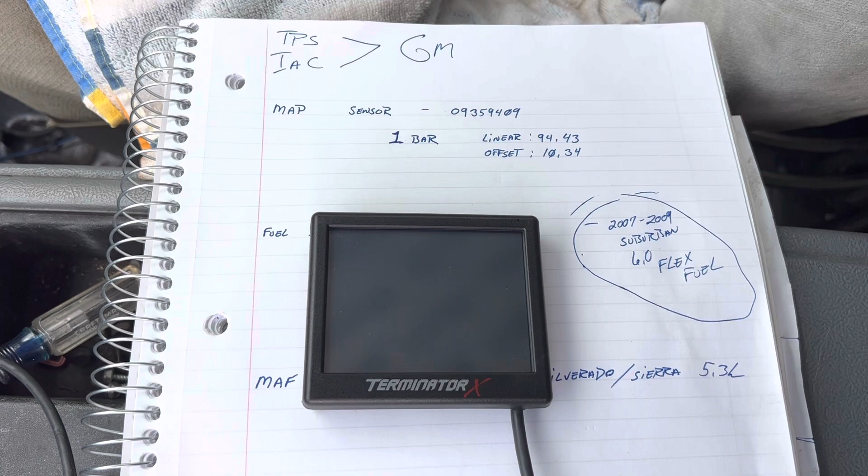Before we get started, it's really important to understand what sensors you have on your motor and what fuel injectors you have. These things take calibration data that has to be very specific in order for the controller to accurately control the engine. The awesome thing about aftermarket controllers is you can use any sensor or any injector you want, wire anything up, then go in and change the calibrations to make it work.

So for us, we just want to understand what's in our throttle body. It's not drive-by-wire, it's a cable, so we have a TPS and an IAC sensor. They both come out of late model GMs, right before GM switched to fly-by-wire.

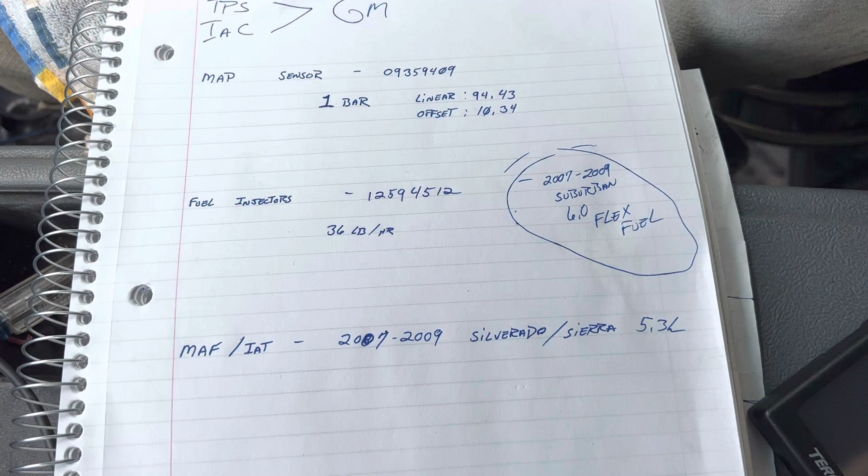Another important thing to understand is what map sensor you have. We have a 1-bar map sensor, which is the map sensor that comes with the LY5, or LY6 or LC9, with the 6-liter Vortec motor. I actually think the controller right now is calibrated for a 2-bar map sensor, and I'll show that to you before we even get started going over things.

Another thing that's important to understand is your fuel injectors. You need a part number for what's on your fuel injectors. The part numbers are always written right on the side of the body of the injector, and from that part number you can head to the internet and understand the flow rate of the injectors. Ours are 36 pound-hour injectors, they come out of an 07 to 09 Suburban flex fuel.

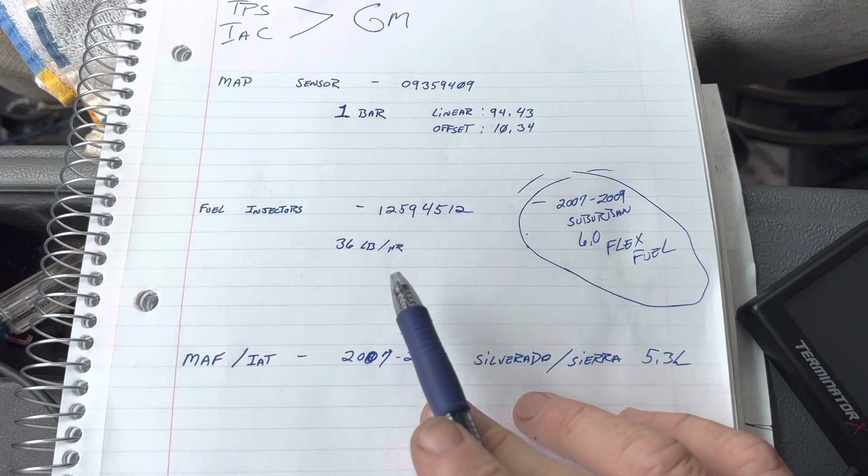These fuel injectors, there's more data to them that you need to know. There's a voltage offset, which says they flow more or less based on how much voltage they get away from their target. There's also a pressure offset that says they flow more or less based on fuel rail pressure changes, and an offset for pressure changes at the pintle, like when the intake manifold is in heavy vacuum at idle or deep decel versus atmospheric pressure at wide open throttle. These are extra calibrations, and there's also a minimum on-time for the fuel injector to even start flowing anything, which matters almost as much as the flow rate for idle characteristics.

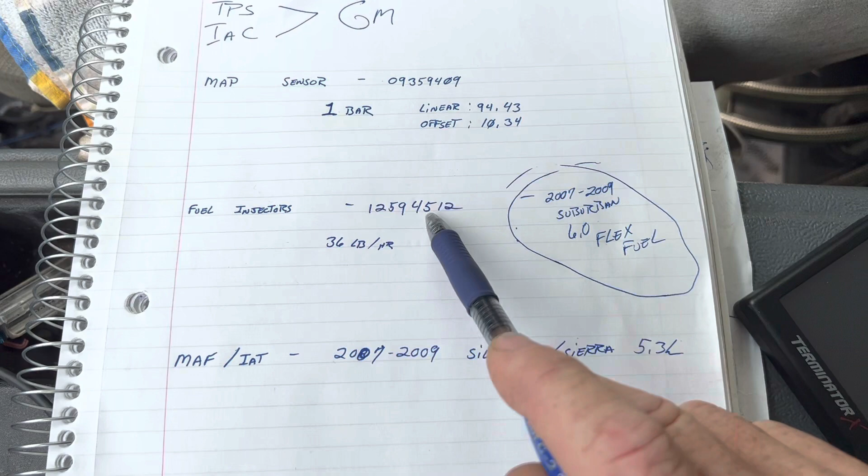So there's a lot more data, and the higher end injectors always come with sheets for injector data. In fact, we could argue that's what determines the better injectors from the lesser ones, is the data they do or don't come with. But with this information, we have all that we need to know.

Also, the mass airflow sensor - we use a 5-wire mass airflow sensor here, so it has the mass airflow and the intake air temp sensor integrated together. The Holley controllers do not use a mass airflow sensor, they run in speed density, but because we have a 5-wire MAF, we also have the inlet air temp. Speed density very much needs to know the temperature of the incoming air.

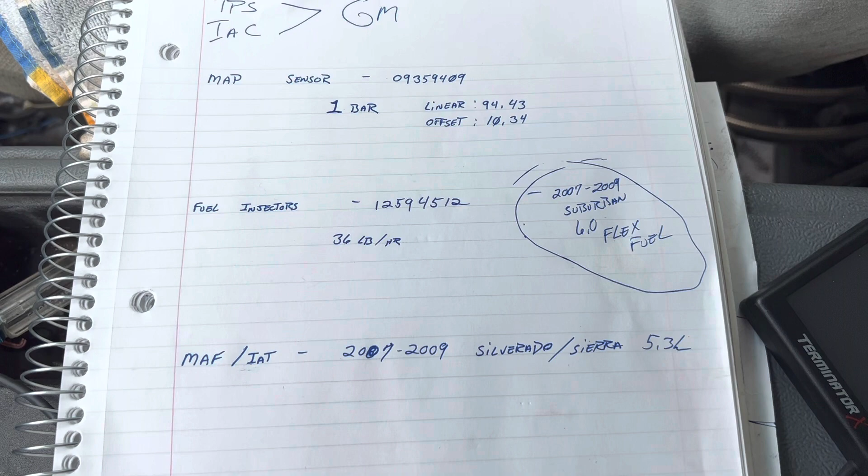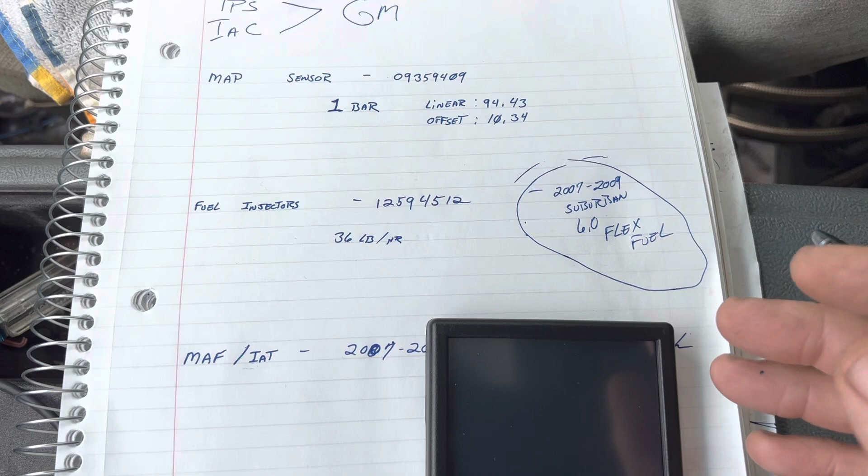I think that's pretty much everything we need. There's some other things you need to know about setting up the controller, like how many teeth are on the crank and the cam, your displacement, and what cam you've got. But these variables are very important to get calibrated to get it running right, and I want to show you a great case in point on that right now.

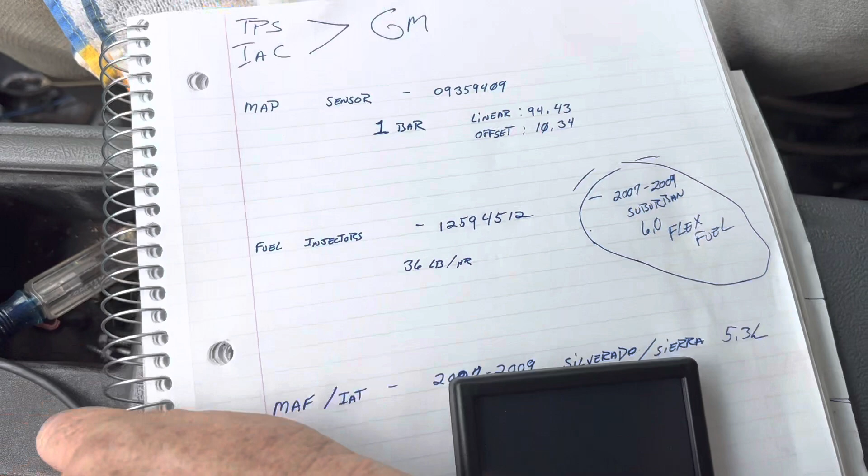With our map sensor, the Holley Terminator also has its own onboard map sensor. It's got a little blue hose running out that you can connect to a vacuum source on your own. I just wanted to use the GM map - you know, they can go either way.

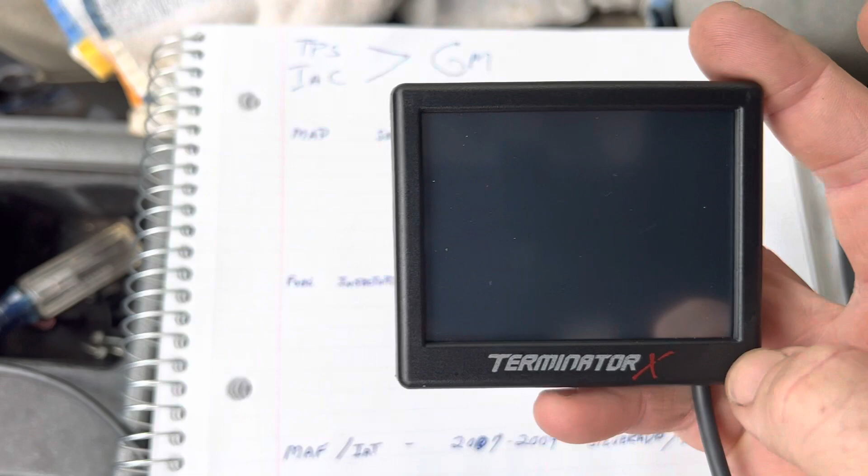All right, so let's power up the controller. I've already kind of got it calibrated, I'll walk back through the calibration again in a minute. I just want to show you guys something on this 1-bar MAP sensor.

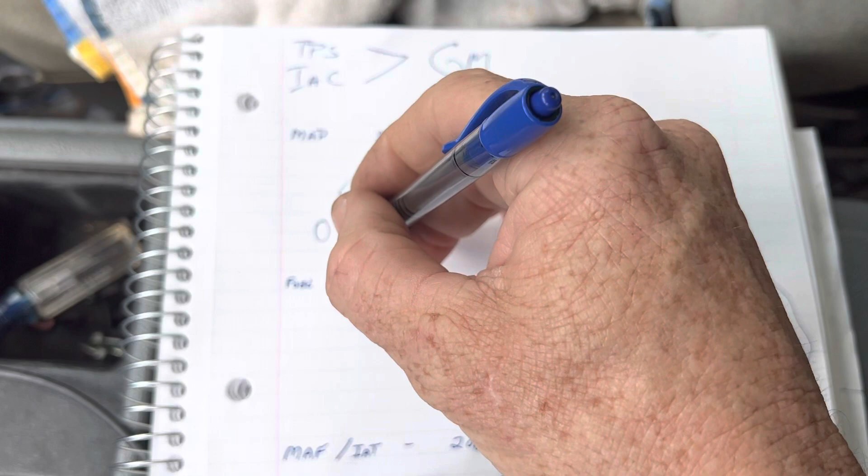A 1-bar MAP sensor - all MAP sensors run from 0 to 5 volts, right? The difference between 1, 2, and 3 bar sensors is where they register up at 5 volts. They all start at 0 kPa, at 0 or whatever, but then they'll go up to 5.

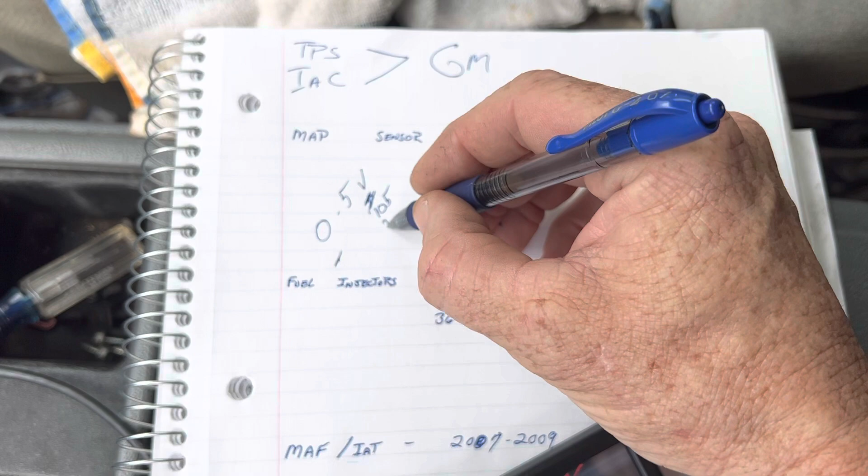Instead of going to a 1-bar, it'll go up to 105 kPa by 5 volts. A 2-bar will go up to 210 kPa by 5 volts. A 3-bar will go up to 315 kPa by 5 volts. And that's how that works.

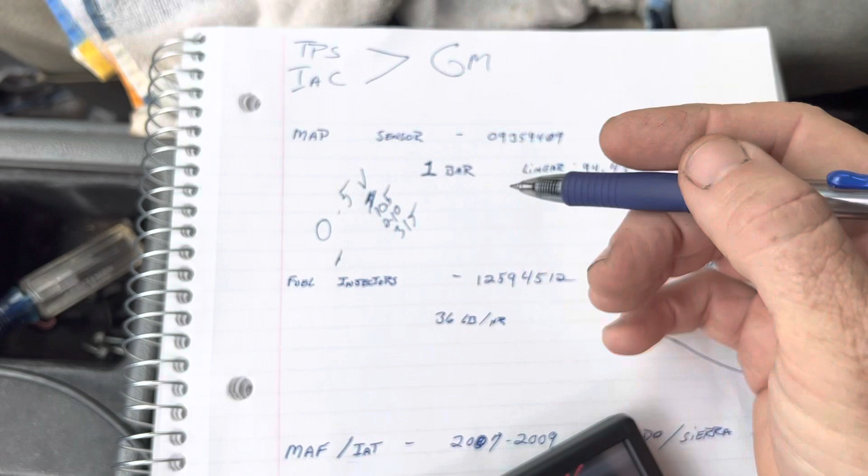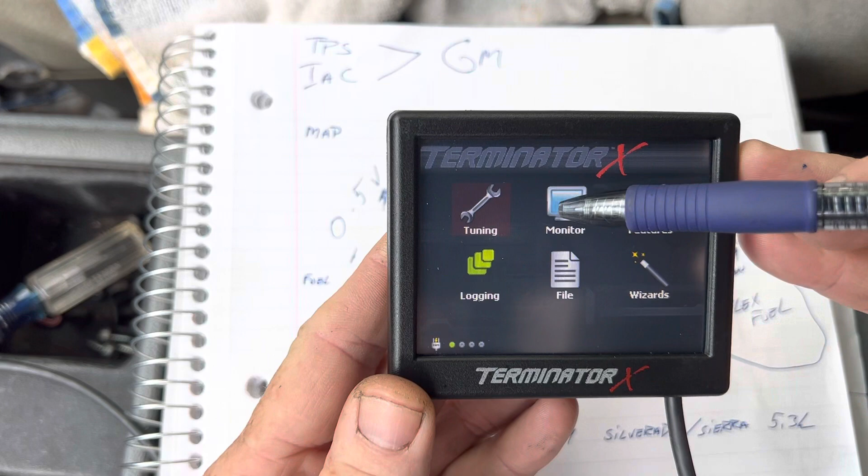And I think that because when we go to our gauges, we'll go to monitor, and then here it double taps, so we'll go to multi-gauges, then we'll go to sensors. And then if you look, MAP is showing 125 kPa. Whoops. How is that possible?

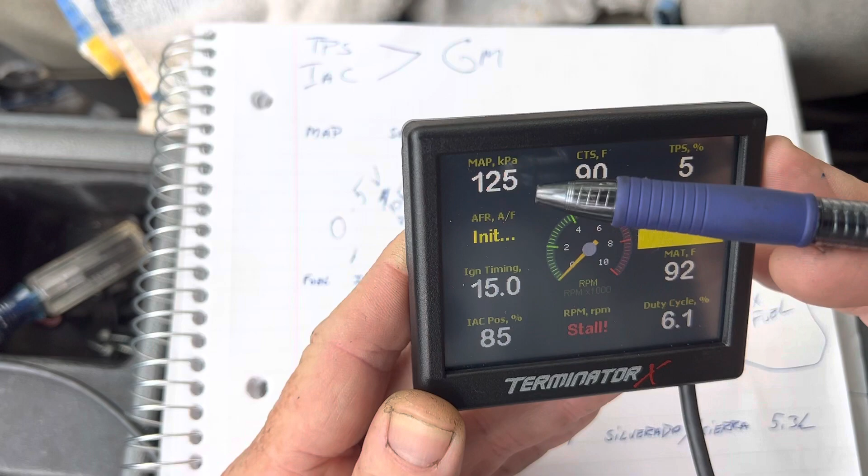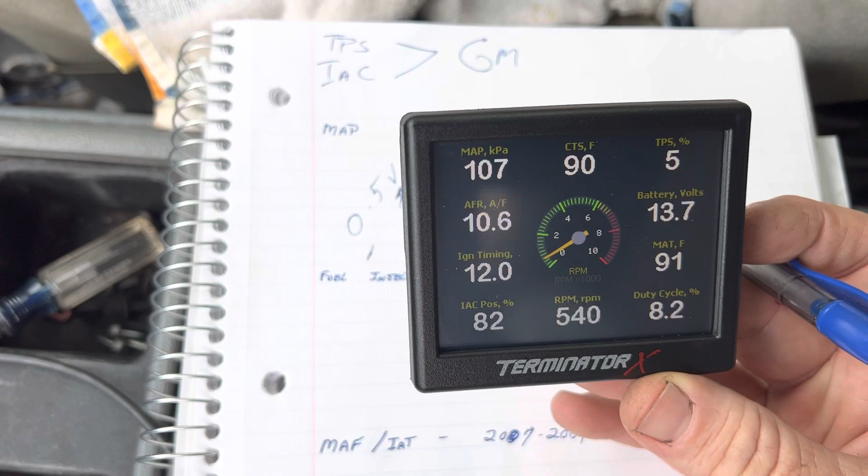When we crank it, when we start it, it'll dip down only to like 90 or to like 105. I don't think that's right.

So let's walk back through setting it up with the handheld.

Oh no. Hold on a second, I have to get that. Nah, I'll get it later. I'll get that later, it'll be fine.

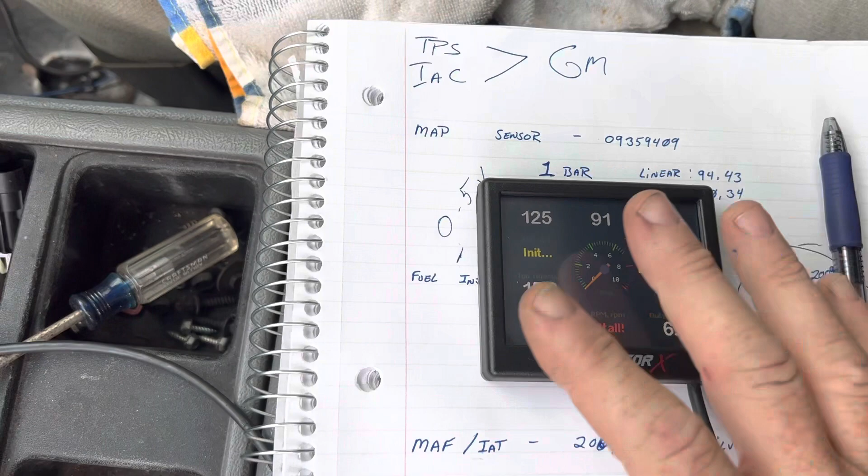Okay, we'll go back to home. Put this up nice here so everybody can see it.

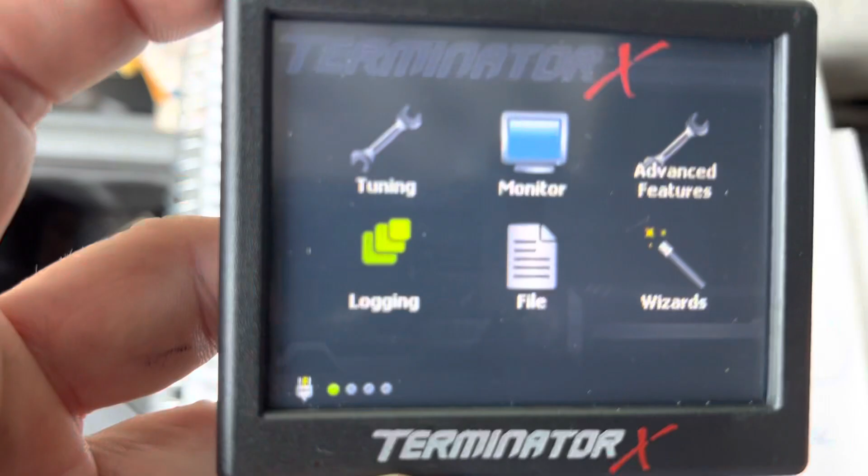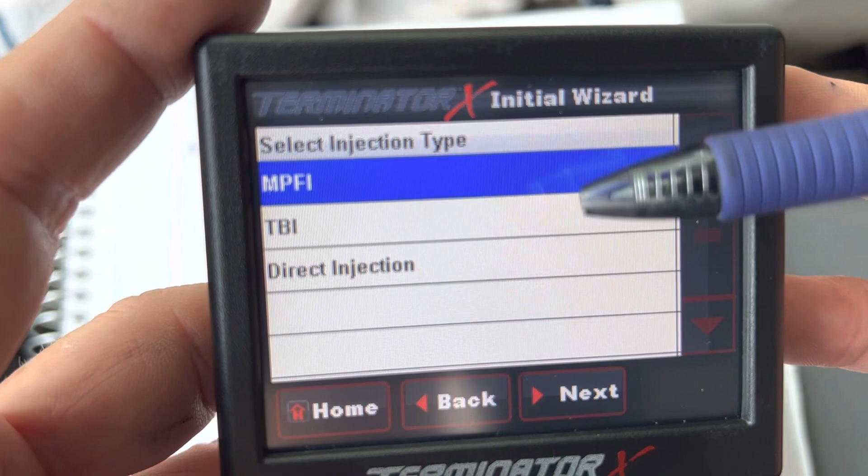And now, select what type of injection you have. MPFI is multi-port fuel injection. TBI is throttle body fuel injection. And DI is direct injection.

This is asking you where your fuel injectors are. We have one injector at the end of each runner outside of the intake valve. This is multi-port fuel injection.

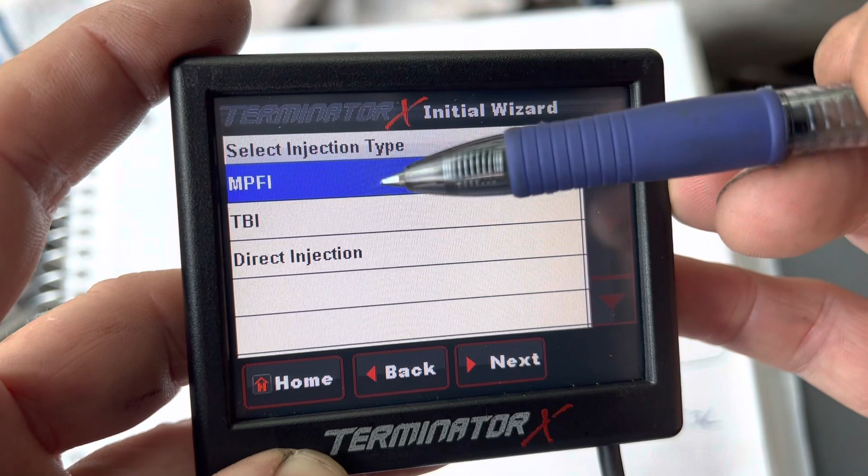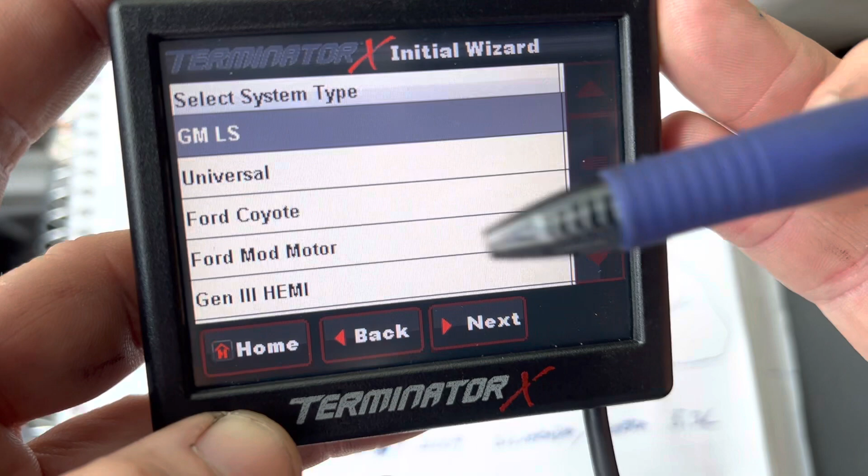Select system type: GM LS, Universal, Ford Coyote, Ford Mod Motor, Gen 3 Hemi. We are obviously a GM LS.

Number of cylinders, 8. It's the only option for an LS. Firing order only gives us one option, good.

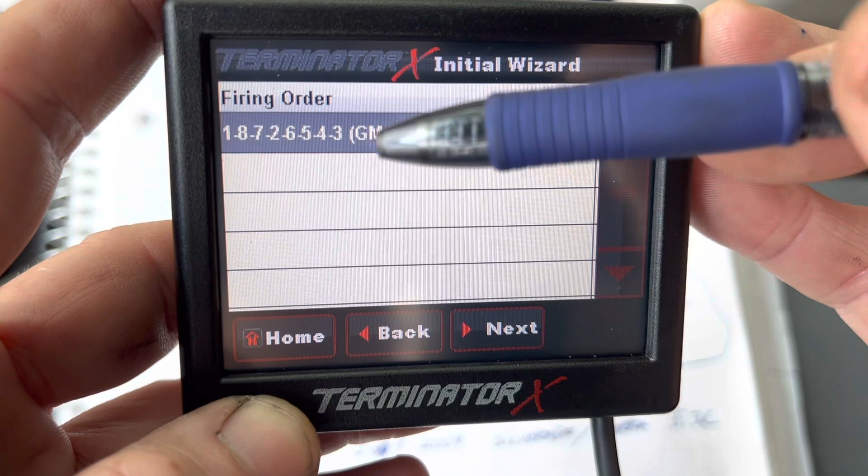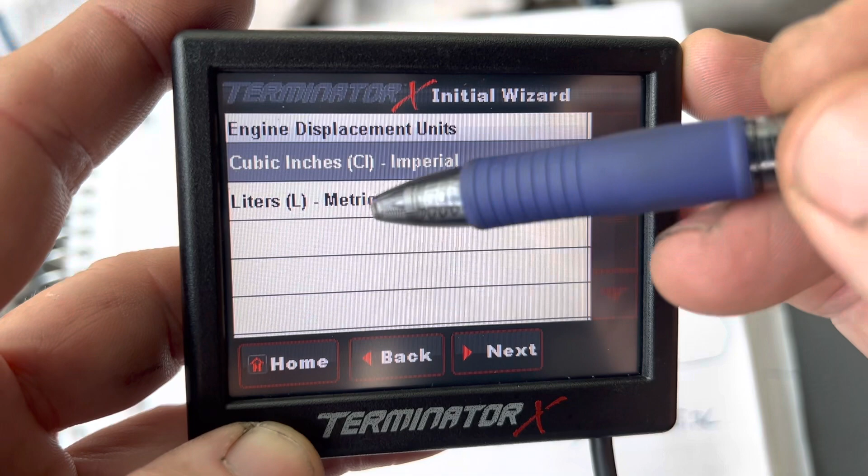Engine displacement, you can tell it how many cubic inches, or how many liters. Let's pick liters. It's a 6-liter engine.

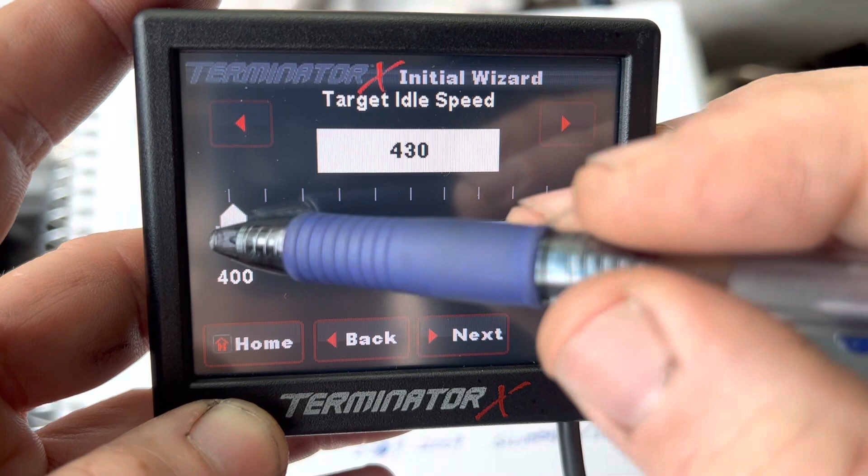Target idle speed. 800. Yeah, let's say 850.

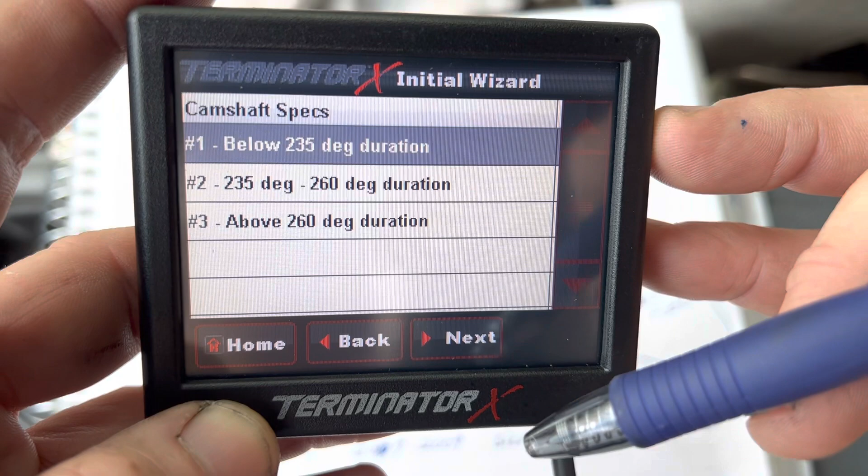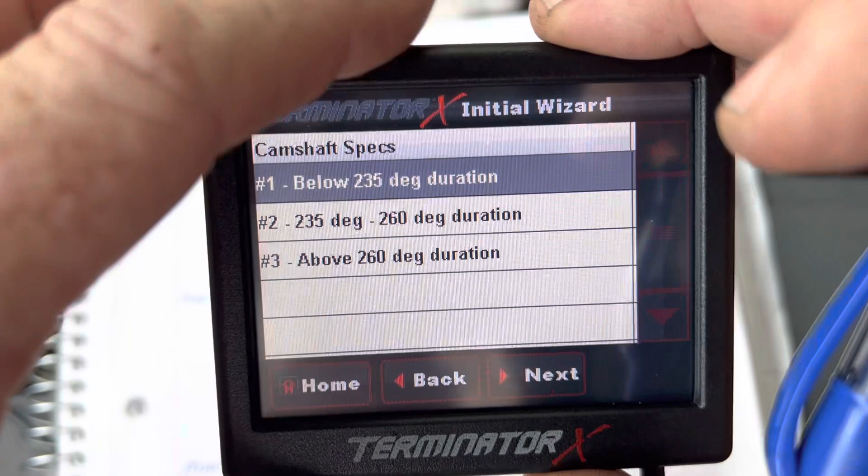Camshaft specs. So what Holley always tells you is if you don't know what the specs are, just go with number 1. We might come back here and revisit it later. We have a stage 2 cam. I might be in here, but I'm not sure. So I'll just go with 1 for now.

Ignition type. This is where I was telling you guys a minute ago about needing to know how many teeth are on the cam and crank. This is a Gen 3 motor, so we have 24 teeth on the crank wheel.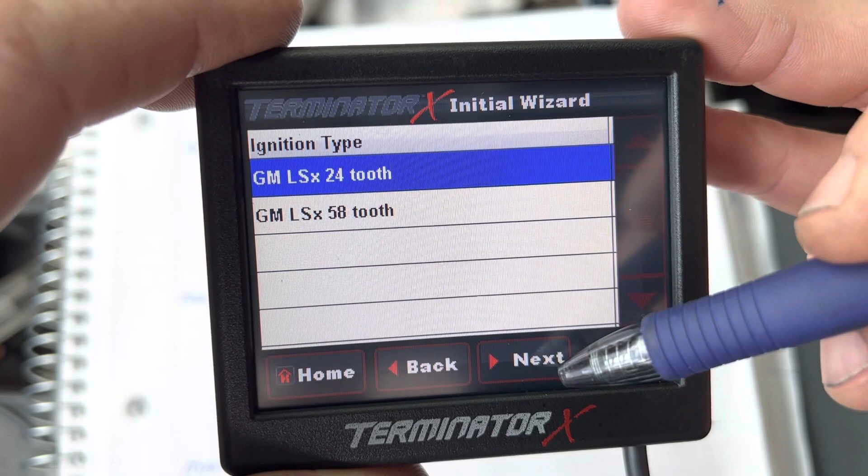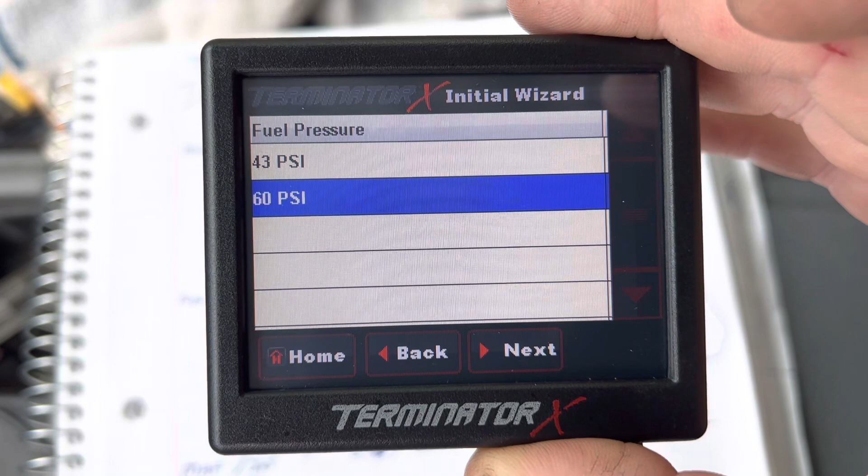Fuel pressure, 60. We're running a GM fuel regulator, so we cannot adjust the fuel pressure. It is automatically set at 58. It is always better to run the higher fuel pressure if you can.

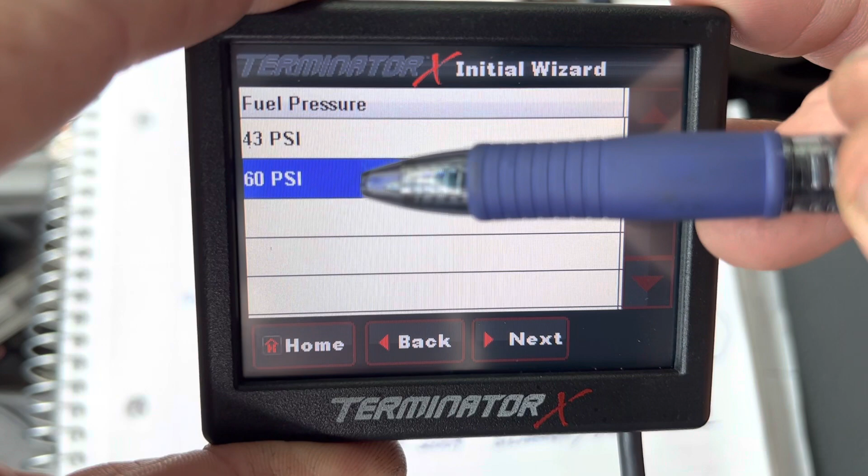And that higher fuel pressure is part of why we like to have all of our fuel lines made by Industrial Hose and Hydraulic. We have very professional transportation lines made because fuel pressure is getting pretty high these days, guys.

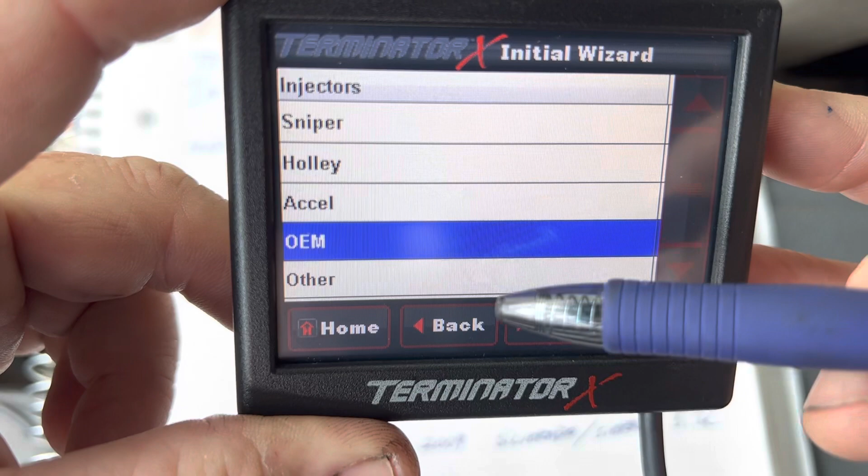Okay, Terminator injectors. This has been a thing for me. So on here, you can select what injectors you have. You can select the Sniper, the Holley, Accel, OEM, or other. If I try to select OEM, I do not get the option for the injectors I have.

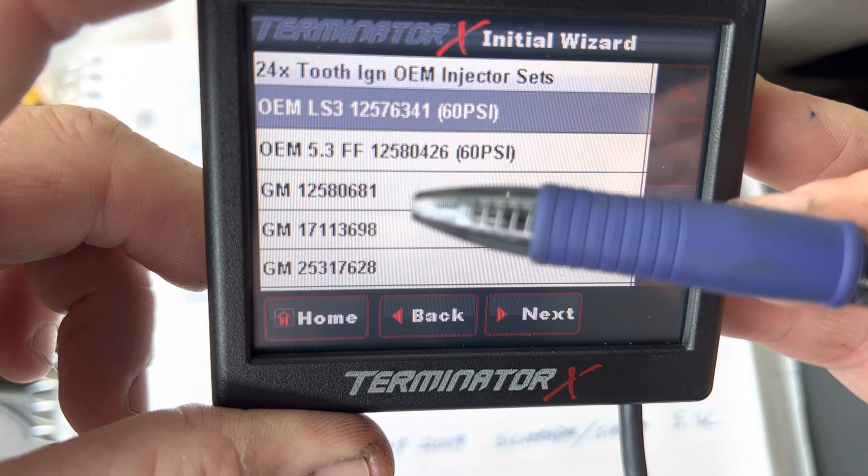I have 1259 4512. I have 4512. And you just, no matter where you look, you don't see 4512.

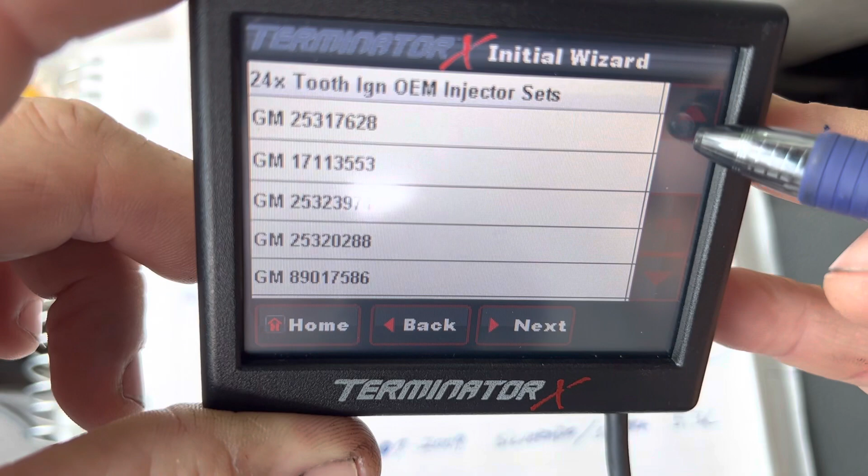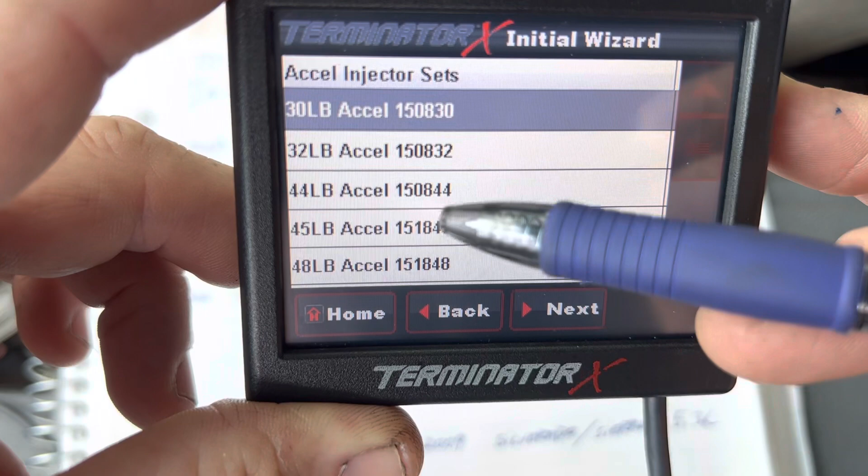So we go back and we look at Accel's. Accel has 30, 32, 44, 45, 48, and bigger. If we go to Holley,

Holley has an option for 36-pound injectors, okay? So that's what I'll say, is we got Holley 36-pound because it's 36 pounds per hour.

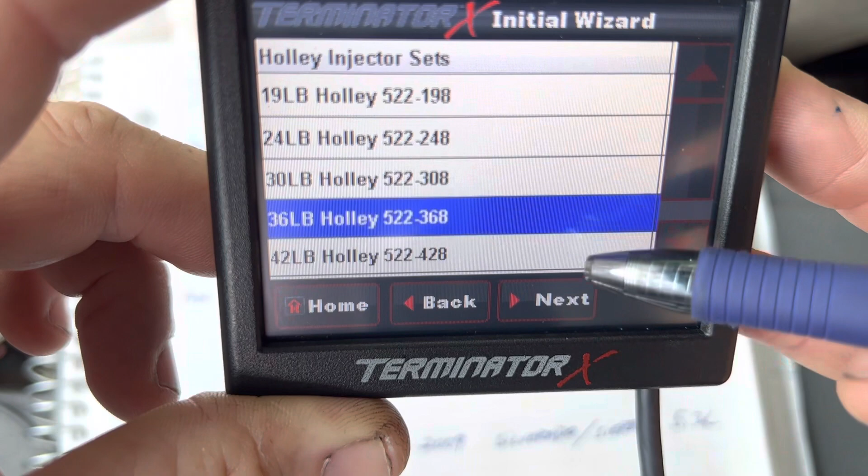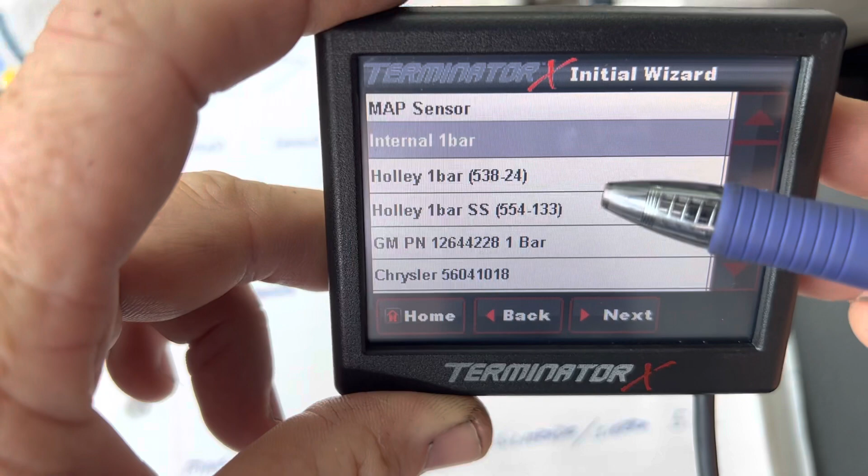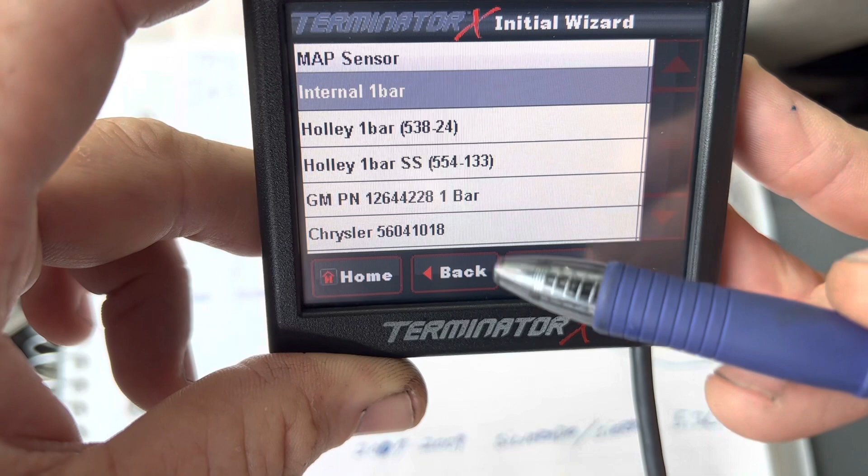Power adder, none, although this, you can tell it has power adders. MAP sensor: internal 1 bar, Holley 1 bar, GM, Chrysler. We get no option that matches what ours is. So I will take this GM 1 bar.

Drive-by-wire, no, we're not drive-by-wire. Idle air control valve.

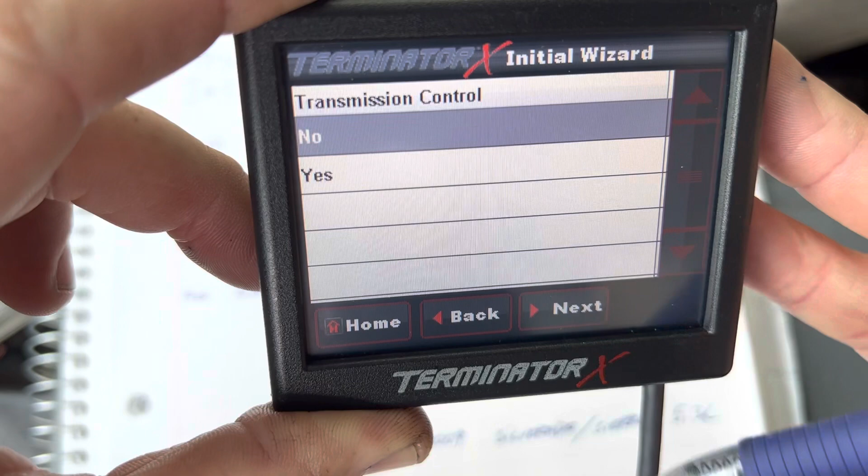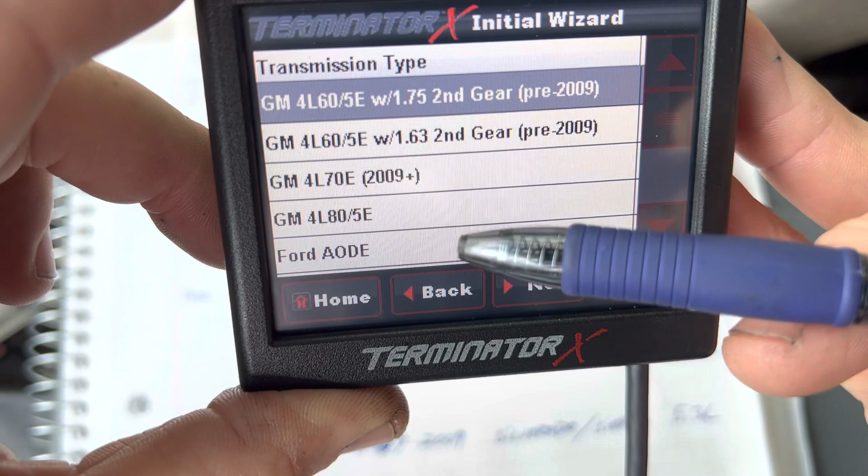Transmission control. Yes. Because we are a 4L80.

Tire diameter. I think we decided we were 35 or 36.

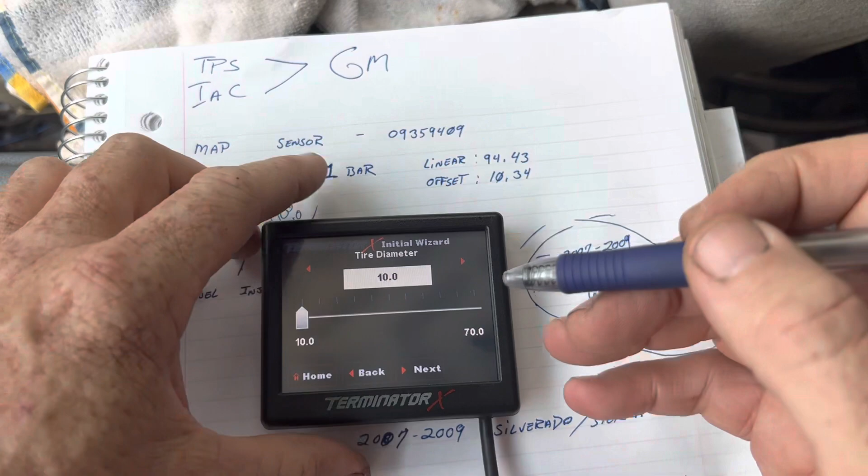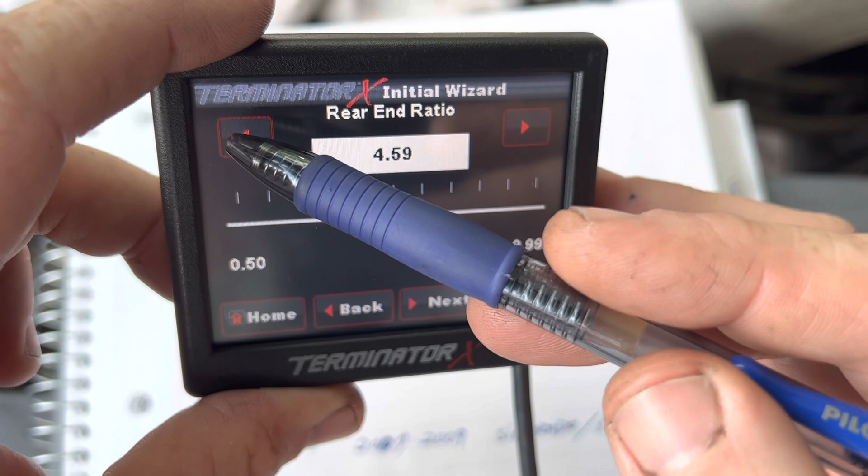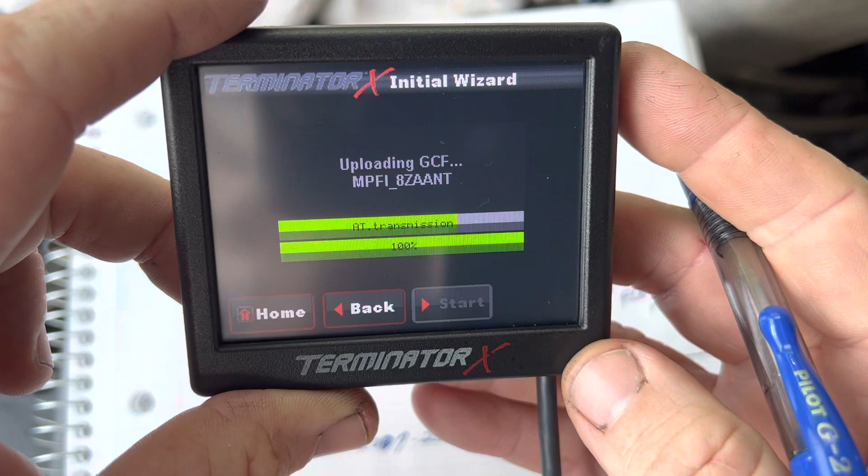Rear end ratio, front and back, and that's it. Now you tell it to start, and now it uploads the file. And that's it. Tells you to cycle the ignition, and it's done. Now you come back in.

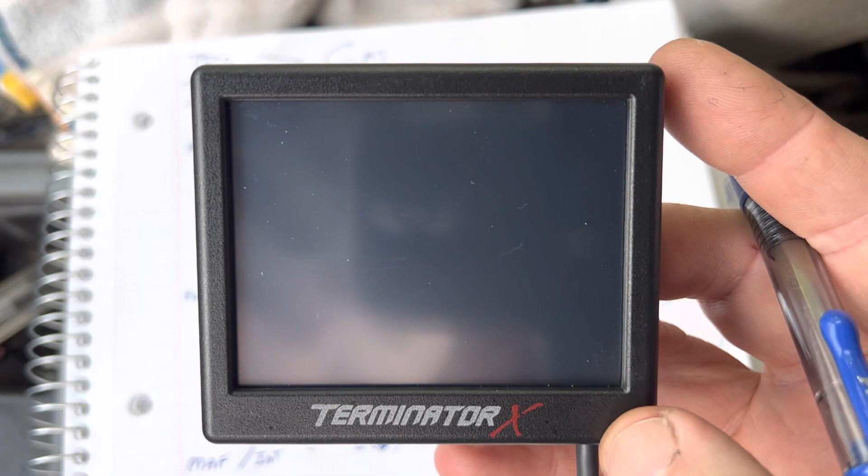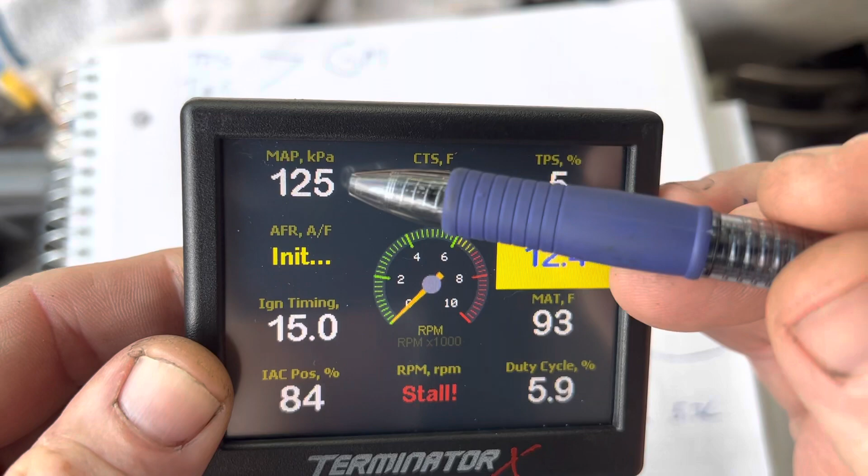When we go to monitor and we look at the multi-gauge and the sensors, unfortunately our map is still at 125. We're here in Florida, we are at sea level, so our map sensor should read 105 kPa, but it should never be over 105 kPa. That means, even though it's a 1 bar map sensor, my linear and offset are different. A linear usually means the range that it can handle. This 1 bar map sensor will cover 94 kPa.

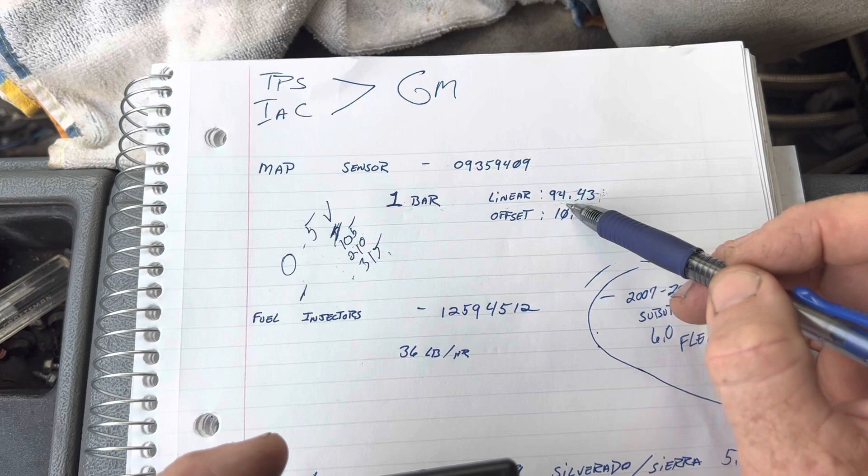And the offset is how far we are from 0 when we start reading, okay? So at 94 kPa is as high as it can go, plus 10, so we'll hit like 105 total by 5 volts, that's the basic math of how that works.

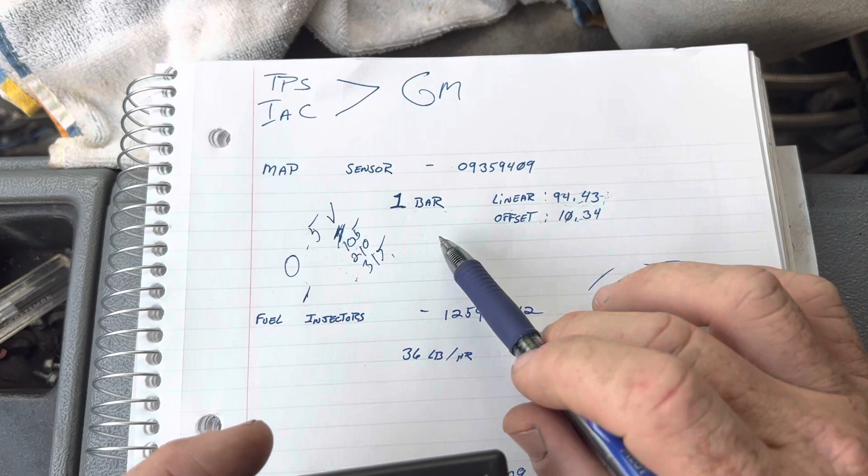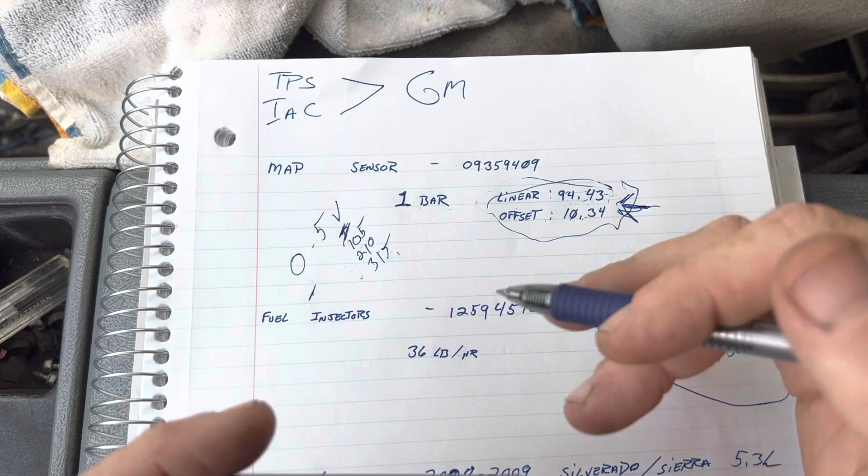And this is not Holley's own linear and offset with the map. This is something I'm pointing out from HP Tuners, and we will understand what the Holley is in a little bit here, because I'm not going to tune this way. I'm actually not really super happy with the way it runs. I'll start it up real quick. I just don't like what that map sensor's doing.

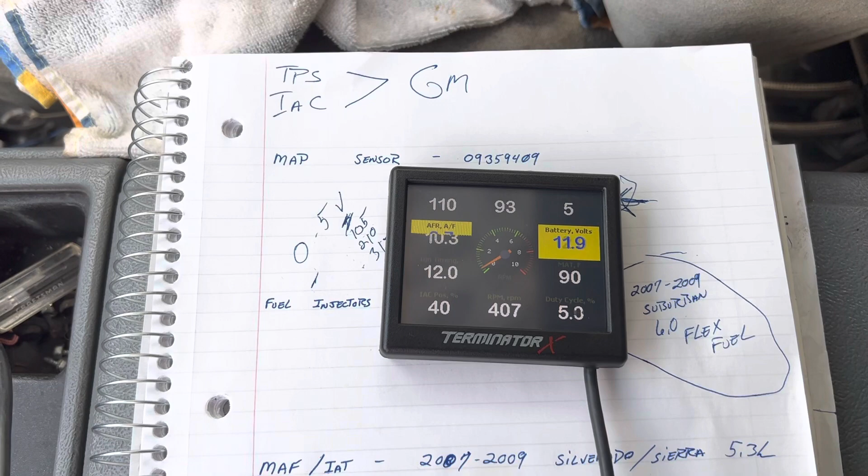I also don't like the idle air control position open at 40. I should open that up a little bit. That should be around 10 or something like that.

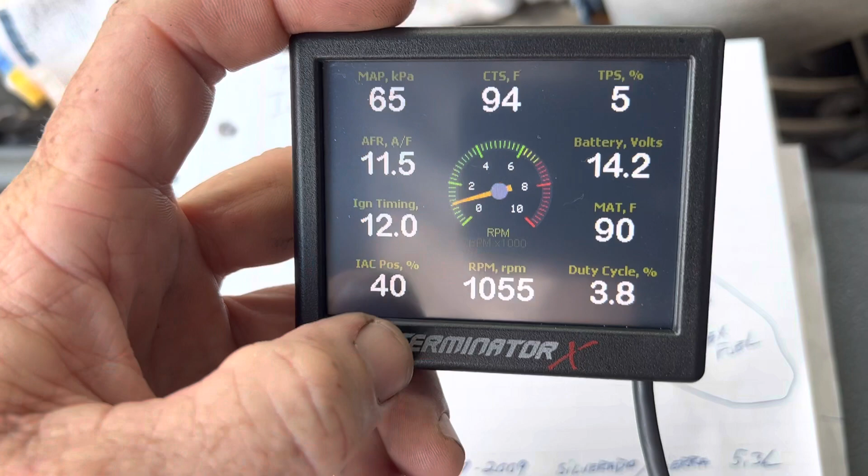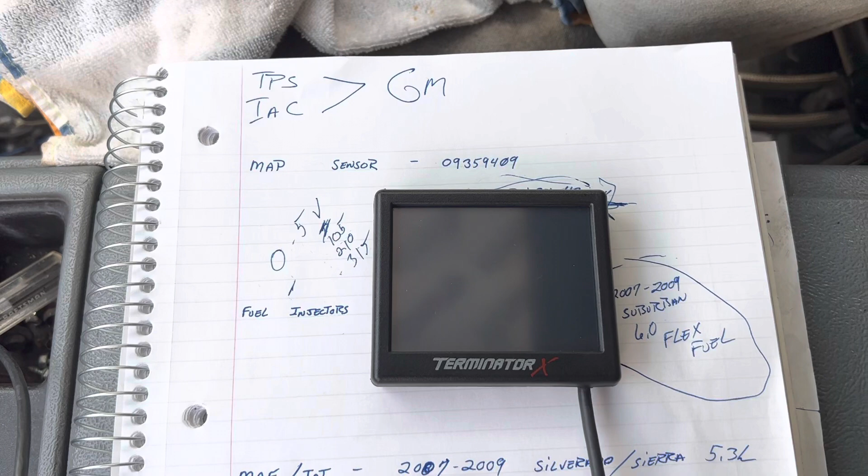So from here, the Holley Terminator and the Holley Snipers all come with this beautiful little handheld controller. The handheld controller has a little SD card in it that has some calibration files preloaded for whatever you're going to do. It's a small touchscreen, and that's how you can negotiate it in this way.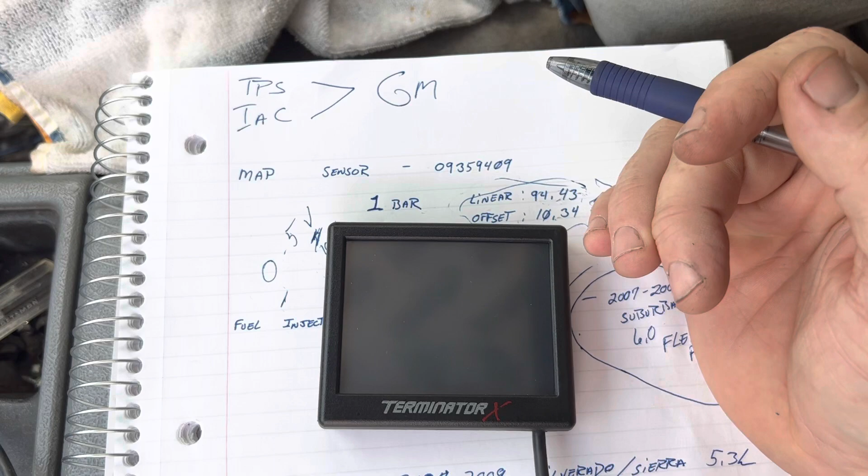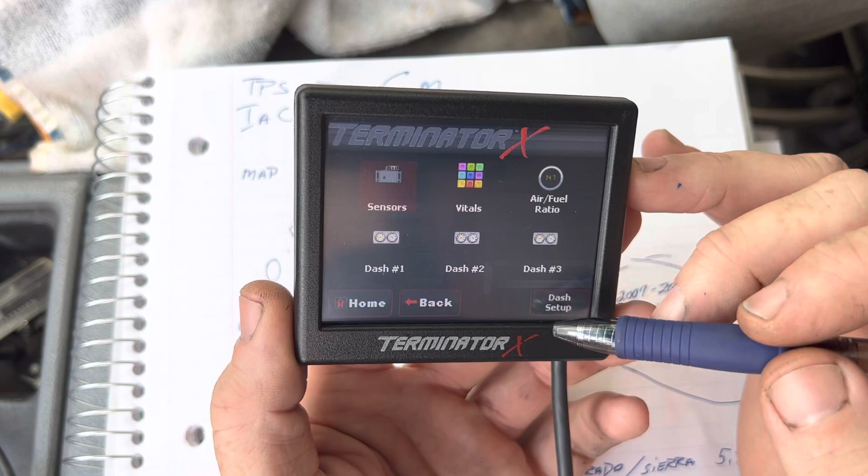Once we're up and running, I guess to be fair and clear, there are other things that you can do to manipulate with this Terminator X handheld. These things would include, you can touch the screen, come over here, go back, and go to tuning or advanced features. You can go into tuning, into basic tuning, and you can tune, let's say, your spark.

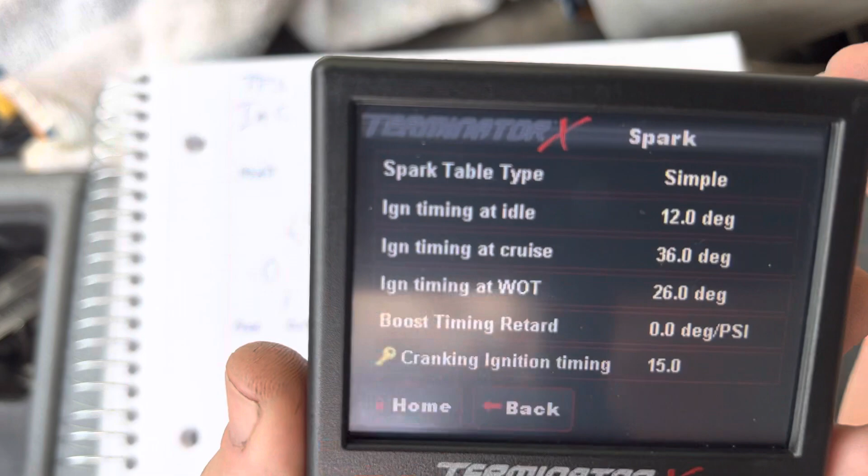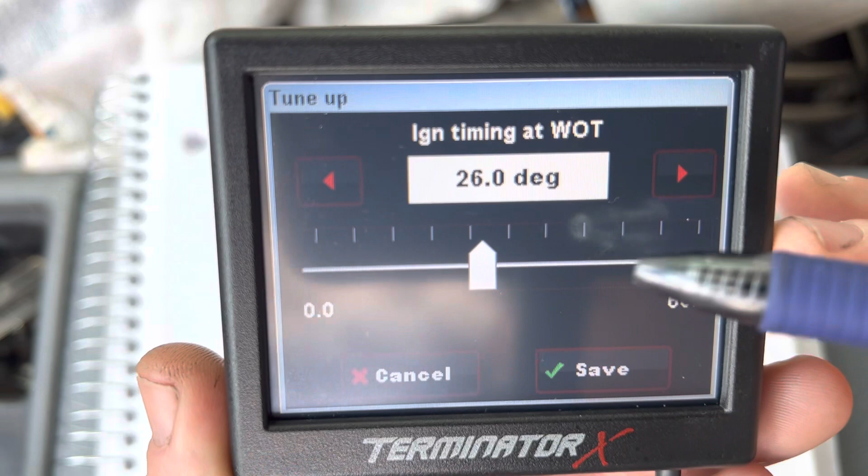And you see what it lets you play with right here? Spark table, ignition time at idle, ignition time at cruise, ignition time at wide open, boost retard, and cranking ignition time. So if we want to adjust wide open throttle, there we go. It gives you a nice little table, and everything is meant to be really easy to make changes to. You can save it or cancel it, and go back and change everything.

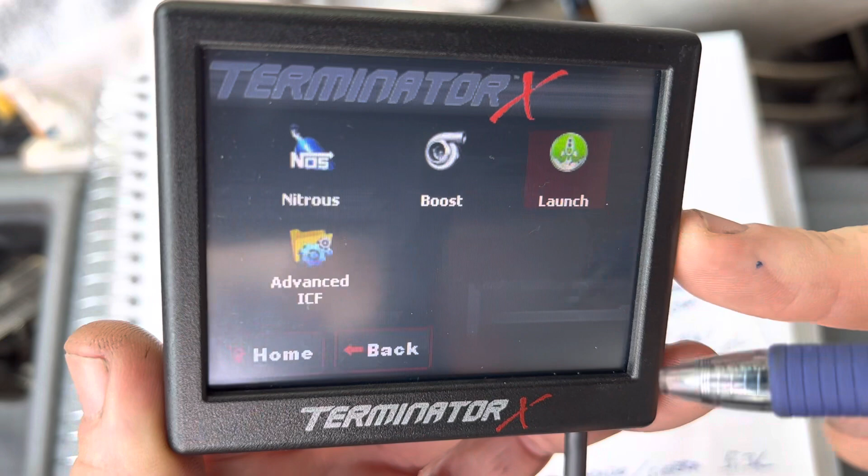And in this way, there's boost nitrous. Yeah, that's a bit much.

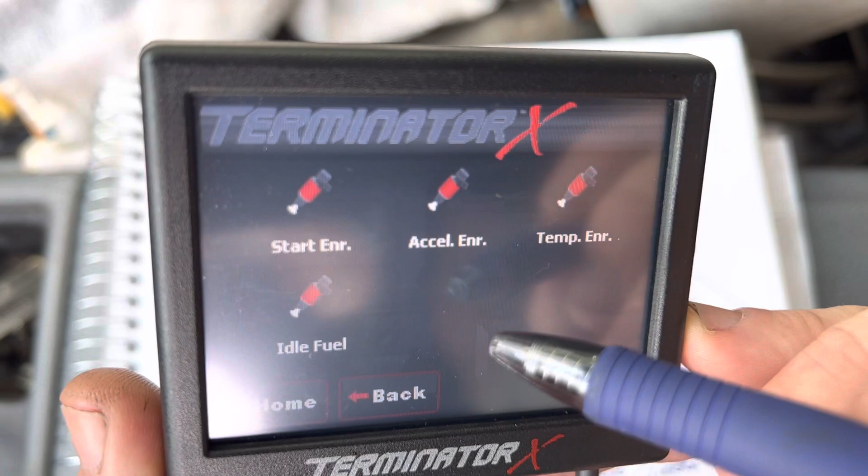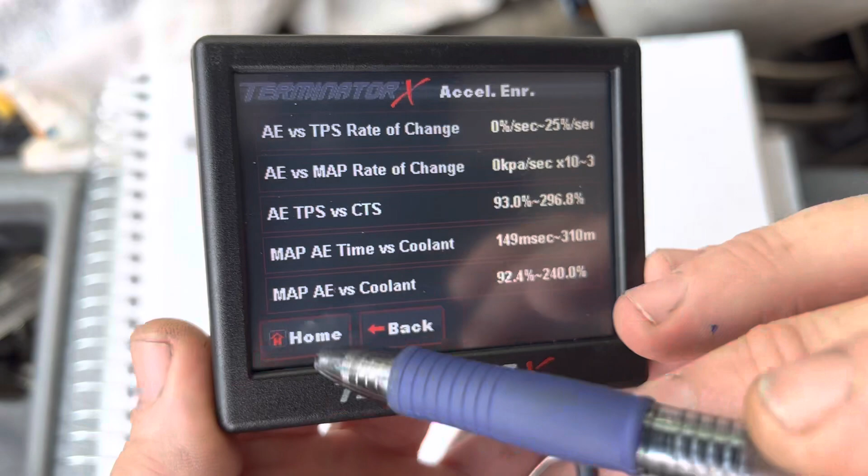I'm going to advanced fuel if you want. You can change your accelerator enrich. It lets you go in and change a lot of things, about as good as you can in text. Okay, and that's what this little 3.5-inch screen is all about, because that's all it is, it's real small. You see my hand, it's real tiny, and that's what you get to work with.

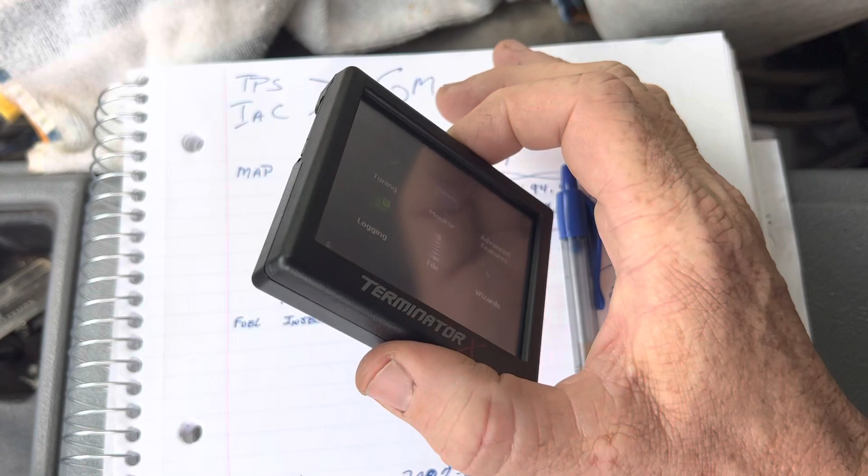This screen comes with the Holley Terminators, it comes with the Holley Snipers, or you can get it with the Terminator, I guess, and it comes with the Sniper. If you get the Holley Pro Dash, I'm pretty sure it's going to plug in the place of this, for better tuning capabilities, either with the Sniper or the Terminator X.

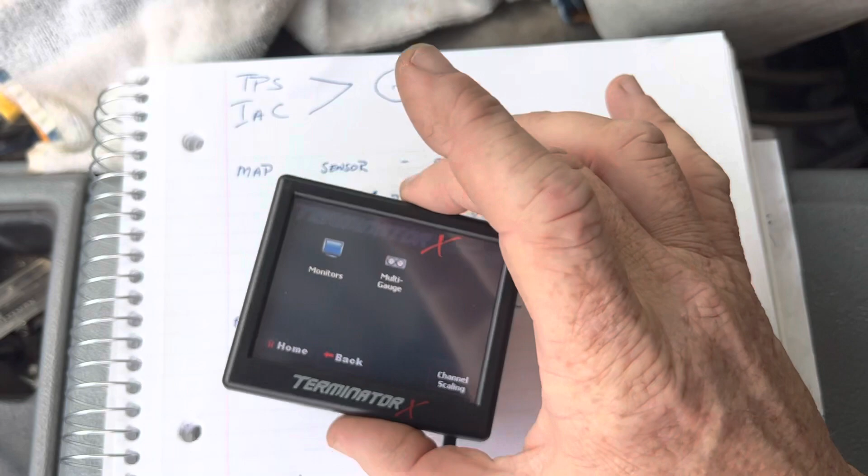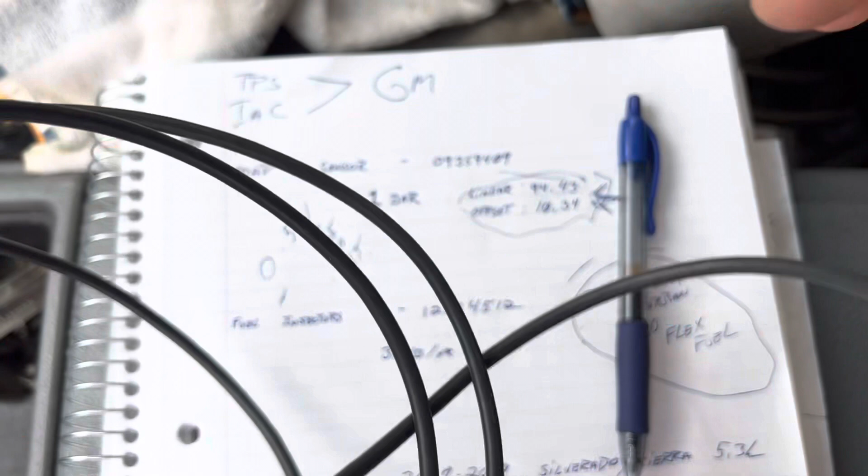This is a Terminator X, but with either one, we can get this cable, which I have right here. See, it says Holley right on it. This is a little proprietary cable, probably the equivalent of like a DB9 serial or something like that. I don't know. This is a special adapter cable that will plug into where the 3.5-inch screen plugs in, or I'm assuming where the Pro Dash will plug into.

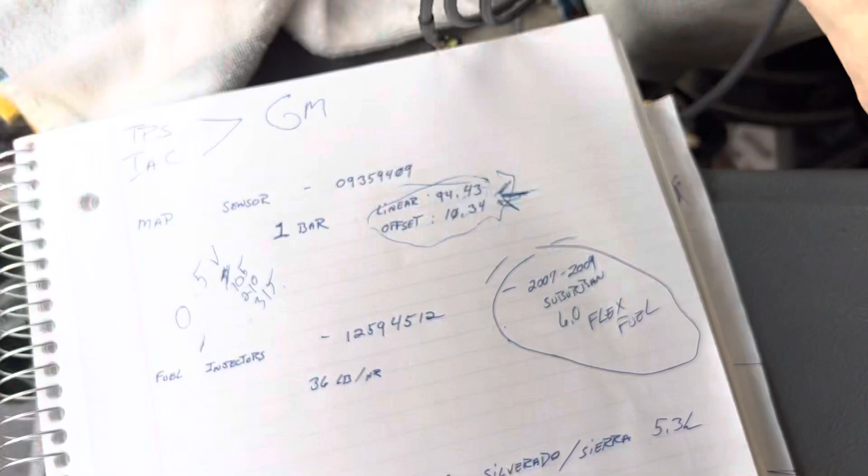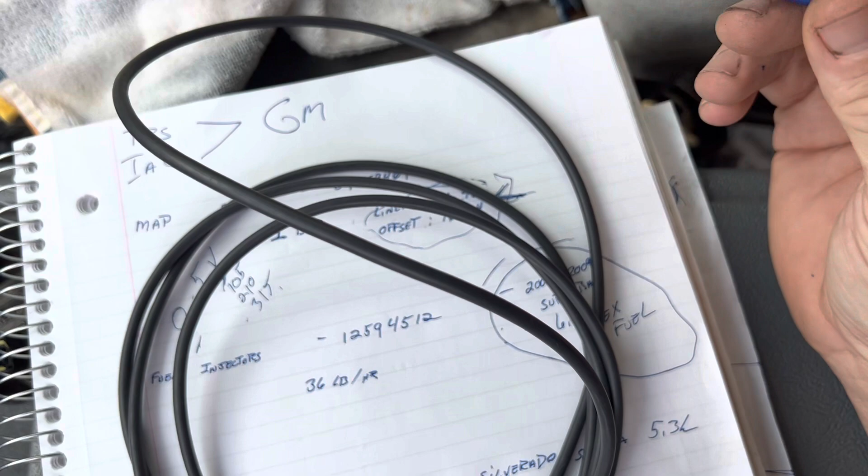And then this will give you a USB that you can plug into your laptop, and then you can do some tuning with the laptop instead of the little blocky thing that we can do here. And that's what I mean to do now, because I'm having a hard time getting a good calibration with the MAP sensor, and I don't want to retreat and plug in a vacuum hose to the controller. I would much rather get my calibration right.

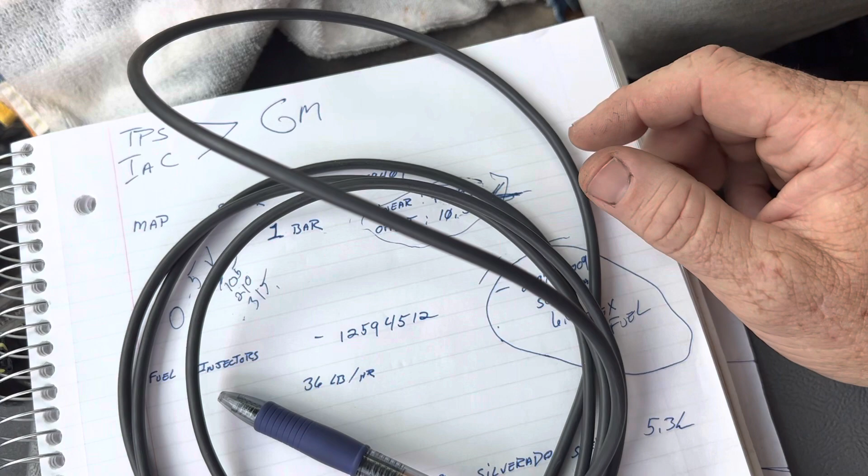So I'll make another video about using the laptop to tune the Holley Terminator and getting the 6-liter up and going. For now, that's pretty much what it is, setting up the Terminator X ECU. It's not bad at all. It's real basic and simple, and that's it. Just getting it calibrated to perfection is a little bit of a thing. I'll make another video on that in just a little bit here.